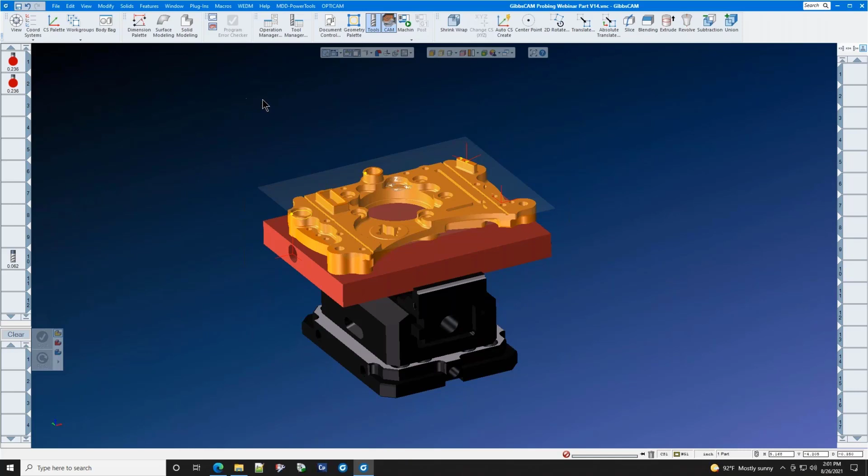Here we have a 5-axis vertical. Let's have a look at the machine real quick so we know what we're looking at. It is a Doosan DVF 5000. There's the machine, with the part sitting on the 5-axis table, and we will do some multi-axis probing today.

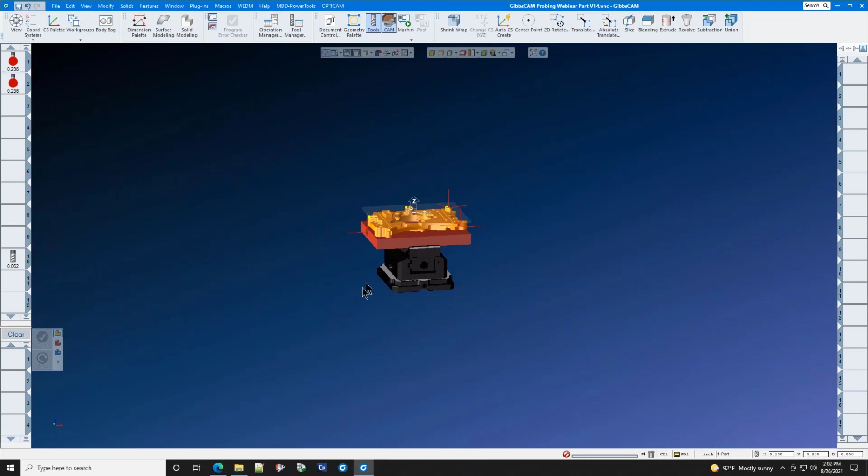Let's look at the part and the fixture, and we've already seen the stock. We're going to show you how to probe the corners of the stock using your Renishaw probe and the Renishaw Inspection Plus software that's already embedded inside your machine.

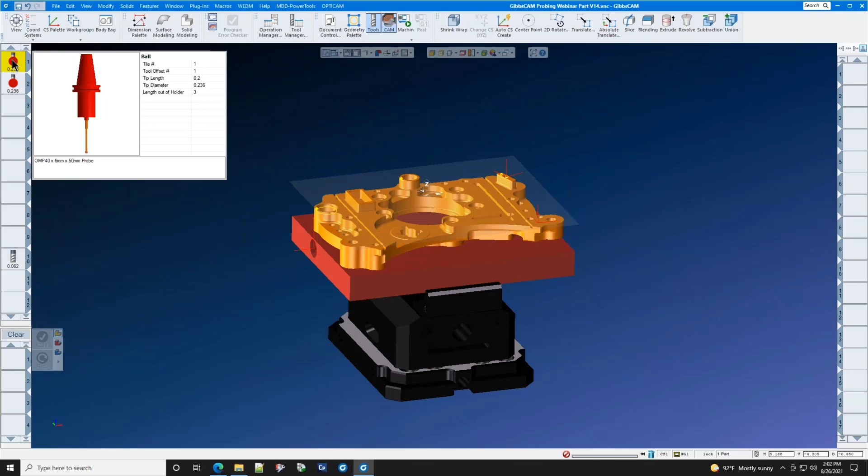Here are the two probes that are most commonly used: the 6mm by 50mm probe and the 6mm by 100mm probe. The diameter of the ball can vary, and you may buy smaller styli if you have smaller features to measure. But when your machine comes from the factory, it generally comes with these two styli, the 6x50 and the 6x100.

In GibbsCAM, you can create this tool very easily. Here are the dimensions if you'd like to snapshot this screen, and then you can save them to your tool list. Once you create a tool in GibbsCAM, you never have to create it again.

I want to take a quick moment to make sure that everybody can see. Yes, everybody can see and everybody can hear, so let's continue.

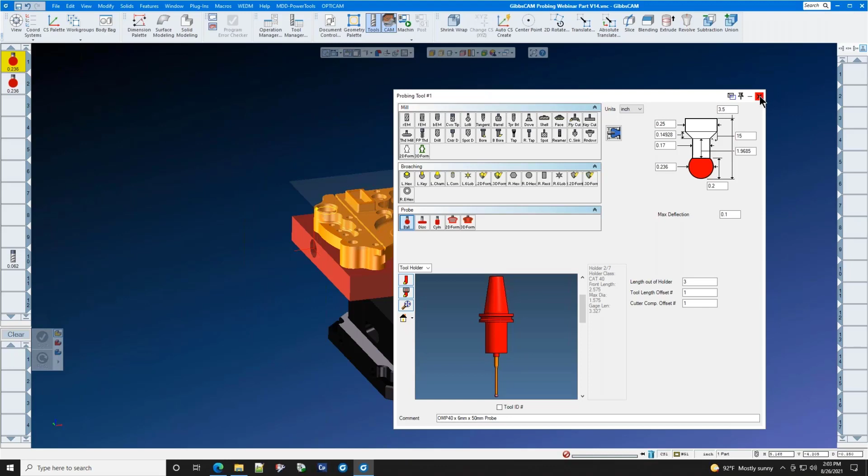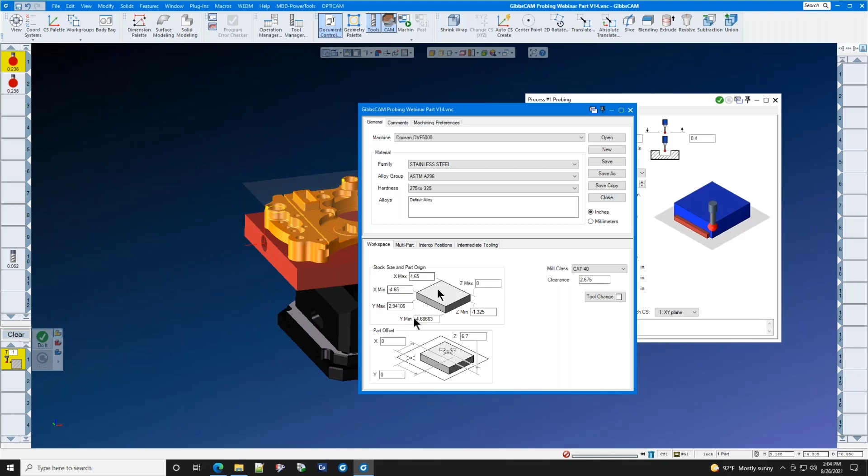Let's bring the probe down into the process list and select corners. In GibbsCAM, we have the ability to probe the stock corners, called out here in the document control page. If we want to probe other stock bodies, we will show you how to do that too. But this is for the corners of the stock size and part origin, and it's almost fully automated.

Here we type in the feed rate we want to use to approach the part. The probe touch time is a number you assign to this operation, so when you go to Operation Manager and look at your summary, you can see the time considered in your total cycle time. We're going to clear the part by 0.4, and once we get inside 0.4, we will go at a slower feed rate. Renishaw does that automatically. We're going to measure an outside corner, and set work fixture 1.

Our XY clearance is 0.4, which is a short way of saying 10 millimeters. In your Renishaw Inspection Plus software, 10 millimeters is the standard offset distance. I want to probe the lower left-hand corner with 2 touches. This 2-touch doesn't change what happens in your machine, but it does show a single touch or a 2-touch cycle here in GibbsCAM if you want to save time with single touch.

How far from the corner do I want to measure? My X distance of 1 and Y distance of 1 — I will measure 1 inch up and 1 inch over. My Z distance is to the center of the ball. I'm going to make this minus 250 because the ball is 236, and I want to make sure the ball gets below the outside of the stock.

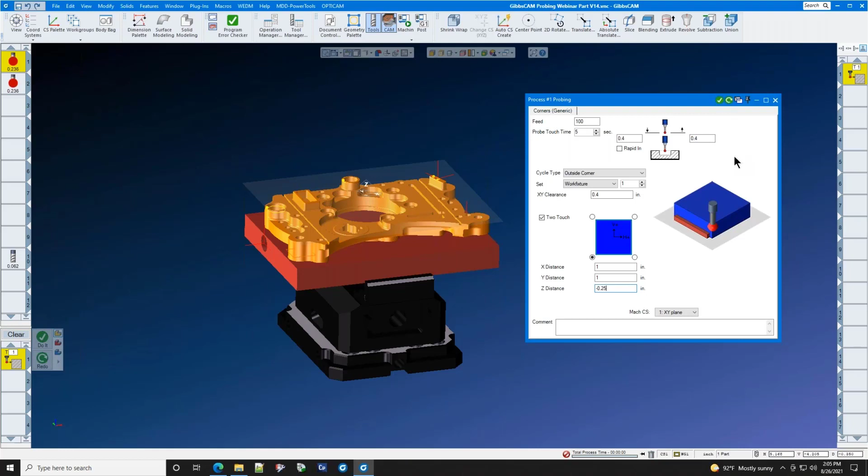When we click Do It, we get our first probing cycle. Let's look at it in Machine Sim and see what it looks like on the machine. Seeing it before you machine it is always the best way to review your CNC process.

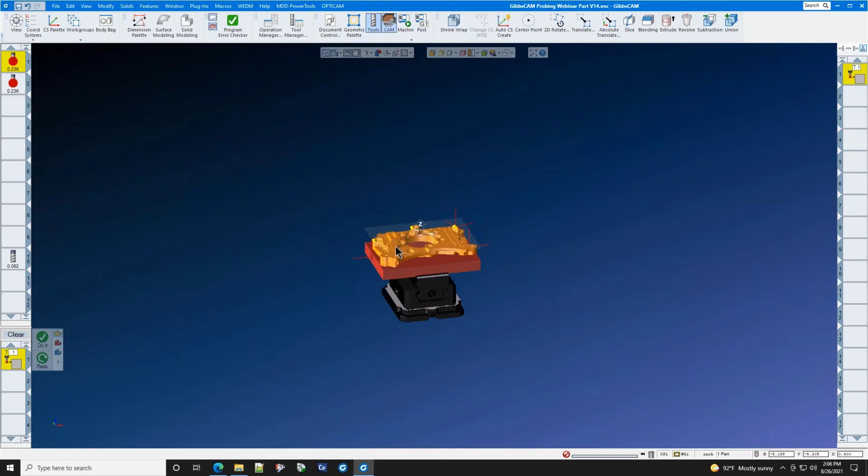We measured X and Y, and set X and Y in this coordinate system to that corner's coordinate. Now we need to do the Z as well. Change from outside corner to single surface from corner Z.

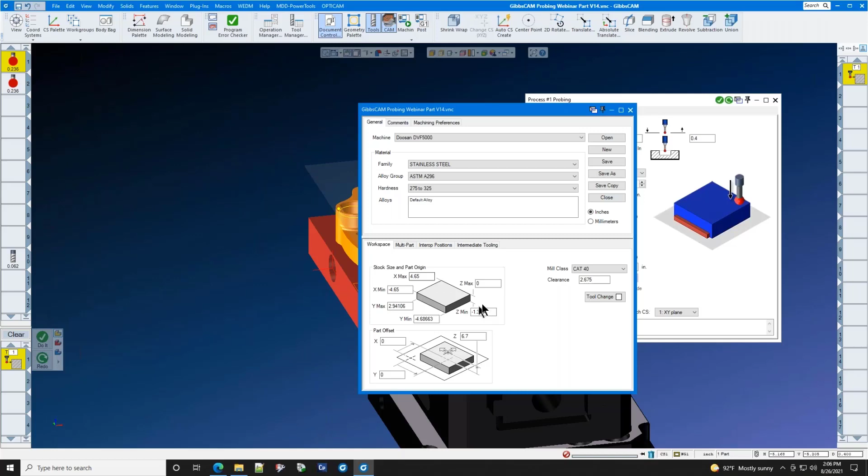The top of the stock is at 0. It's already been precision faced off, so we're going to set the probe depth at 0. When the probe touches the top of the stock, we want it to be set to 0.

This is a single surface corner, XY clearance 0.4, 2-touch, lower left corner, Z axis, and always from the positive side. It would be kind of difficult to probe this from the negative side. And of course, we're in the XY plane.

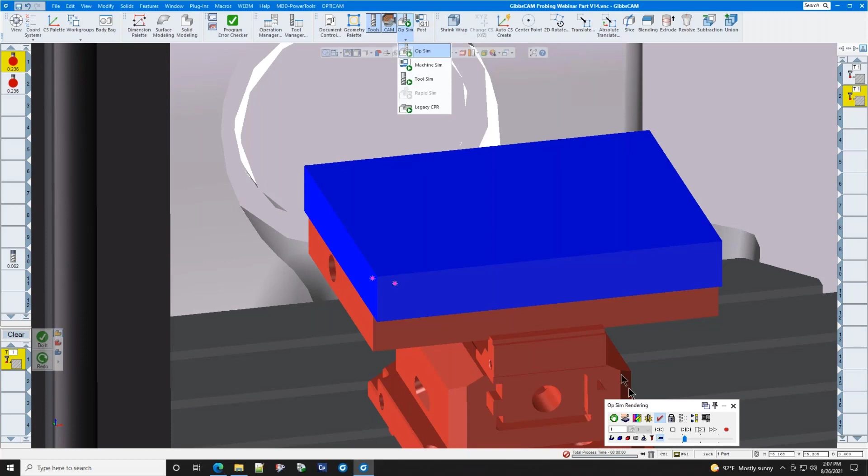When we click Do It, we now have 2 probing cycles. Let's watch both of them run, then change that to OpSim and rewind. You will see corner 2-touch, corner 2-touch, and top. We just set that corner to these coordinates.

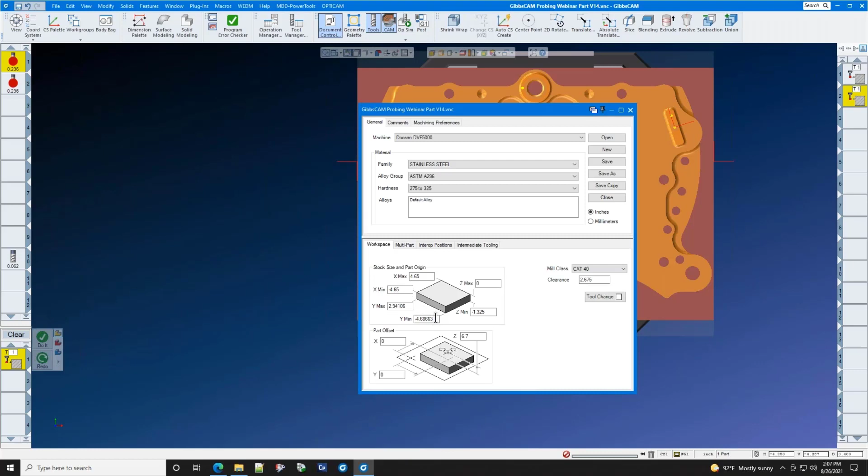You don't have to set your corner to 0. GibbsCAM and the Renishaw probe know that 0 is going to be over here, the distance from this corner. You can see the distance is X is minus 4.65 and Y is minus 4.68663. So don't worry about that — GibbsCAM and Renishaw will set your coordinate correctly.

You can duplicate this for each additional corner simply by opening the first op, changing to the upper left corner, and clicking Do It — you've got a probing cycle. Double click Op 2, change to the upper left corner, click Do It. You can do that all the way around the outside of the stock with very little effort.

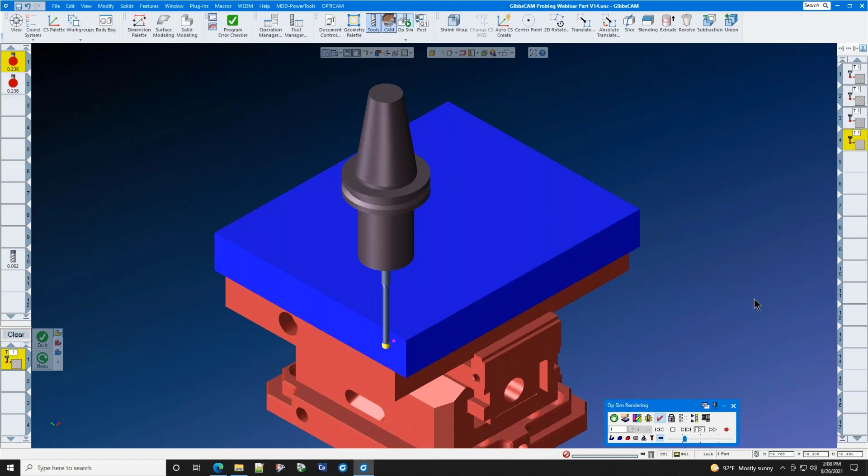The probe is a very accurate measuring device that most people only use as an edge finder. Here, we are teaching you how to use it as an edge finder. A little bit later in the webinar, we'll talk about measuring your parts and even updating the wear comp on your tools. Here, we're talking first about datum setting.

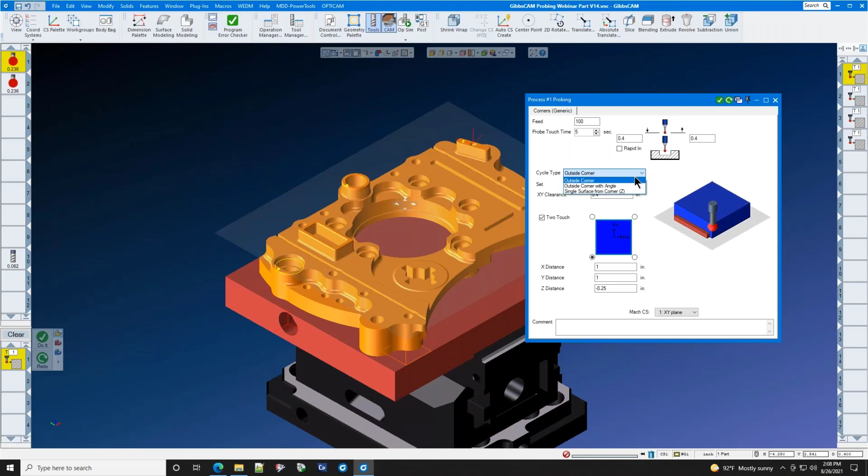And of course, let's review that. Datum setting is with work fixture or work plane. We're using work fixture, and we're doing corners right now. We did the outside corner and we did the Z.

Once you automate this, every time your operator puts a new part in the machine and closes the door, you have created a predictable, automated process that does not make mistakes. Your probe's accuracy is 40 millionths of an inch if you have the standard probe. If you purchased the improved accuracy probe, which is a CMM quality probe, your accuracy is 10 millionths of an inch. So the probe is much more accurate than your machine.

Let's move ahead a little bit and talk about probing other types of features. Remember, this webinar leans a little bit more towards how do I probe rather than why do I probe. The first thing I'd like to look at is let's measure this bore and this boss right here.

And we're going to use that feature to set our 0. Bring the probe down. Select — now, instead of corners, we will select shapes.

We will set our feed rate at whatever your machine can tolerate, or whatever your machine is programmed at from Renishaw. I'll put 4 seconds in here for touch time, and the standard Renishaw standoff distance of 0.4 and 0.4. Let's do circular pocket first.

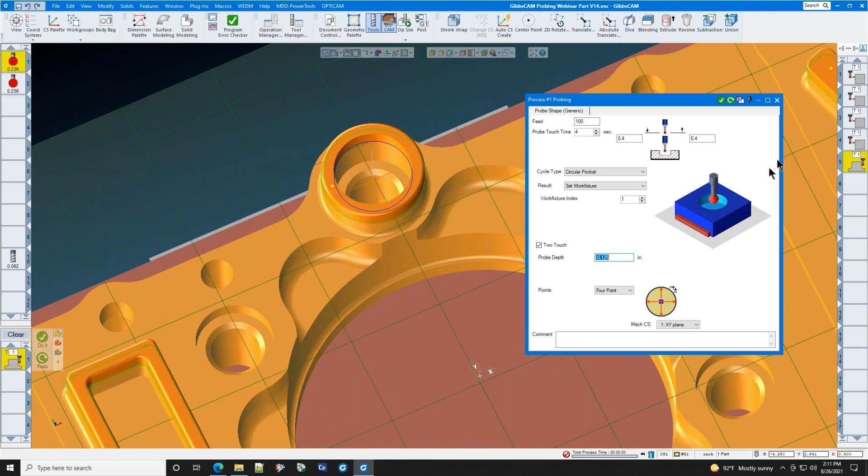Let's have a look at that cycle by itself, but first we need to set the part to stock. Click on the part, right click, body type is stock.

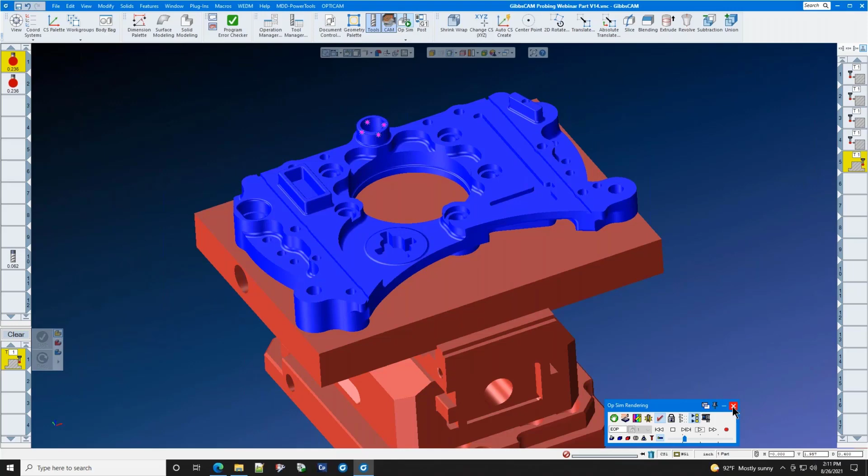Now when we go back to OpSim and press rewind, we will see the part, and let's select here, skip unselected ops. That way we don't have to watch the corners. Let's probe the bore. 1, 2, 3, 4. It just probed that bore very quickly, and it output the dimensions of that bore to your offset table, which means that this is going to be the center of your part.

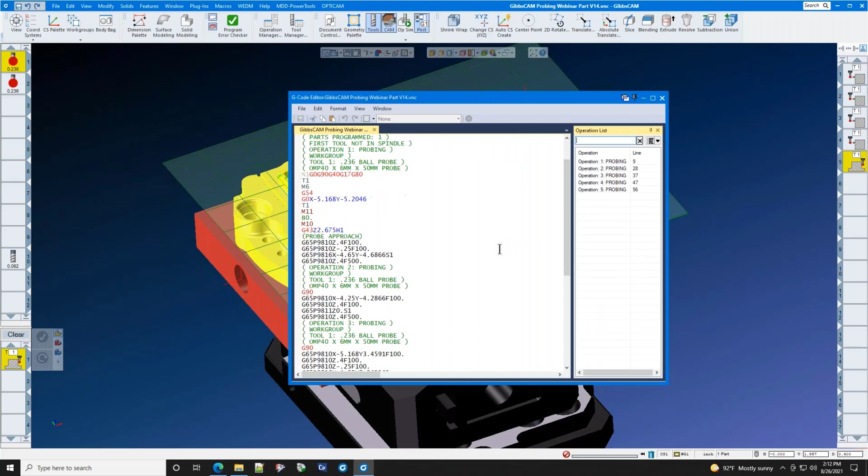The probe and the GibbsCAM software, all of this happens automatically. Here we have a probing post, and we're going to output the code to this folder and click Process. Here you will see very neat, very clean Renishaw code. If you've written any of this by hand, you'll recognize it, and it's very, very easy to understand, especially when you have your Renishaw Inspection Plus manual in front of you. There we have a little bit of code, and we measured that bore.

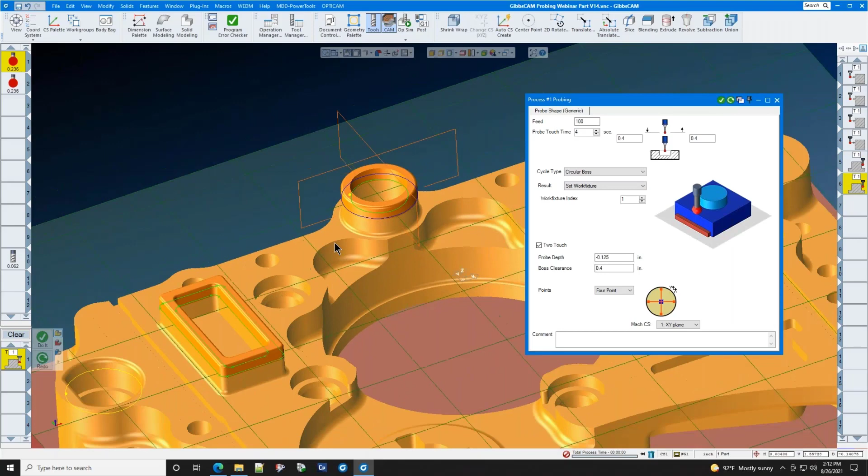Let's change up and measure the boss now. Double click the process. We can simply reuse it. It has almost everything we want, except we'll change this from circular pocket to circular boss. Select the outside boss geometry and click Do It. Again, we have a cycle that looks very different from the circular pocket cycle. It knows to step up and over the boss when it's doing the measuring process.

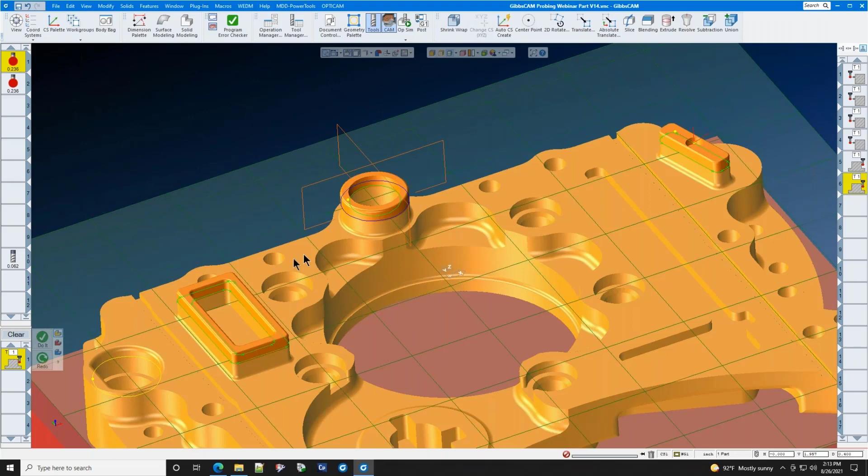Notice that while GibbsCAM is measuring your part, it puts a little star on the part to show you where the probe touched. Again, we have just set the work fixture offset using that feature. That feature may have been pre-machined, and then we want to accurately set its distance to the center of the part. Now that we've looked at circular pocket and circular boss, let's look at single surface.

In single surface, the only geometry that you need is a point. We have a point here, we have a point here, and we have a point here. The interesting thing about these points is when we go to single surface and we have our probe depth for Z, we're going to single surface, axis is Z from positive side. What is our probe depth? Well, we're not quite sure. We can alt click on that point and GibbsCAM automatically puts the number here. We click, check our parameters and do it.

And we now have a Z probe, a single surface probe right on the edge of that D hole. And we're going to come back and measure that D hole in a little bit because we all know the challenges of a hole that is shaped like a D. But let's go probe a couple of other Z points. Here, very quickly, we'll change the Z probe depth with the Alt key to 0. Click the point and press do it. We have another probing point there.

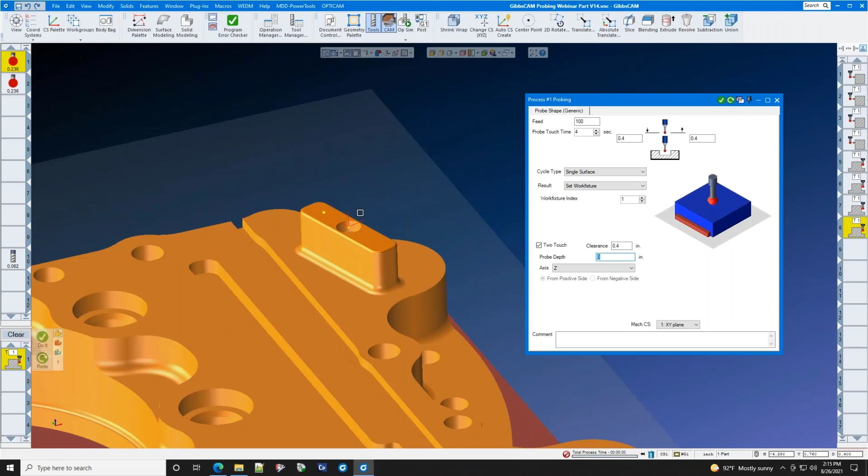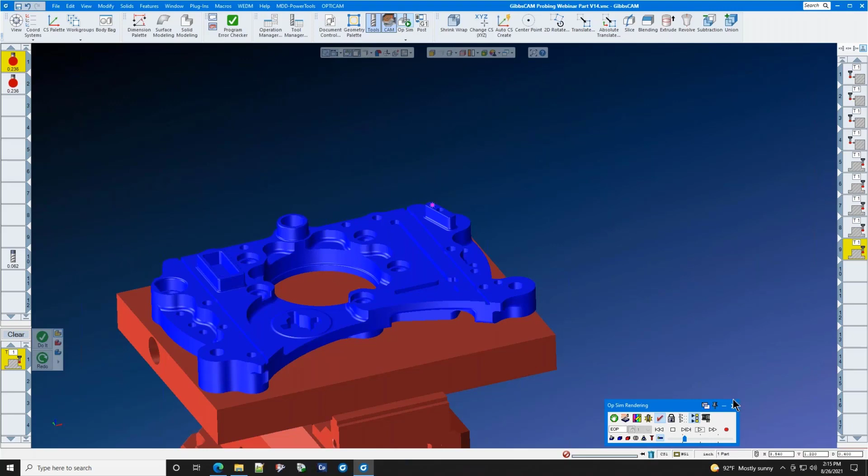Let's check this one's Z point. It is also at 0. Simply click on it and press do it. It's very easy to create probing code, and the code doesn't need to be tested. The code is tested right here in a virtual environment, and you can be assured that when you go out to your machine that everything is going to work correctly. You have visual verification that your probe is doing what you want it to do.

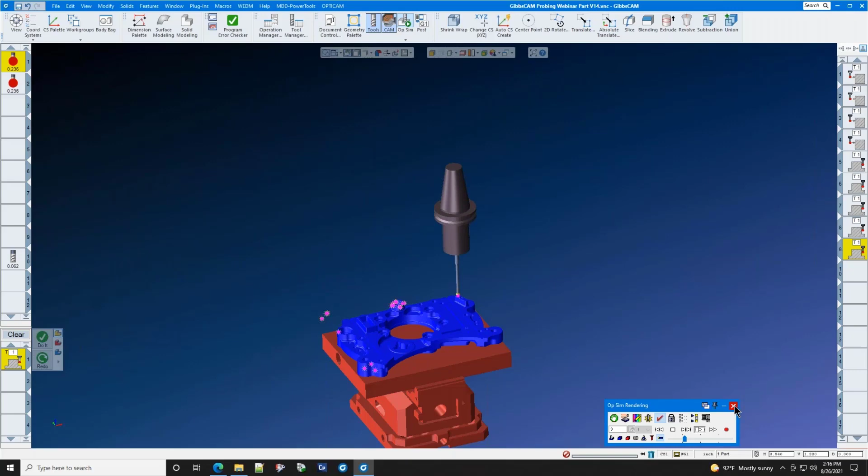Speaking of which, the new probes are much smarter than the old probes. When GibbsCAM puts your probe in the spindle, the software checks the battery condition of the probe. It makes sure that the probe is hot and running. It makes sure that the skip signal is hot and running in your machine. And it ensures you that your machine will be ready to probe if you don't get any alarms at the beginning. We just probed a couple of circular features.

Now we have another circular feature over here that's quite a bit different. It's a D hole. And as you can see on the D hole, it has a little D shape. I extracted the complete circle because we need the complete circle when we're going to measure that hole. But what do we do about this position right here? If I click there, that's a disaster waiting to happen. You're going to get an alarm at the machine. It's going to say not found.

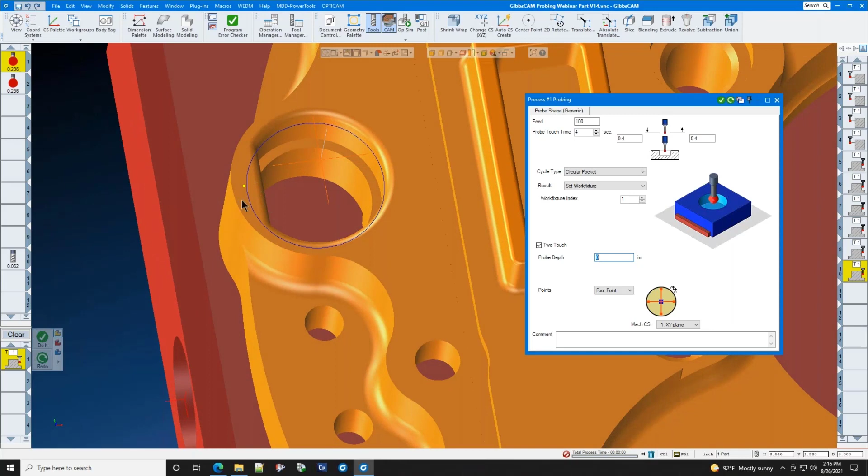And let's make that depth a little bit better. We got minus 375, and we'll make that minus another 125 and redo. But when we get to that point, that's going to make a horrible mess.

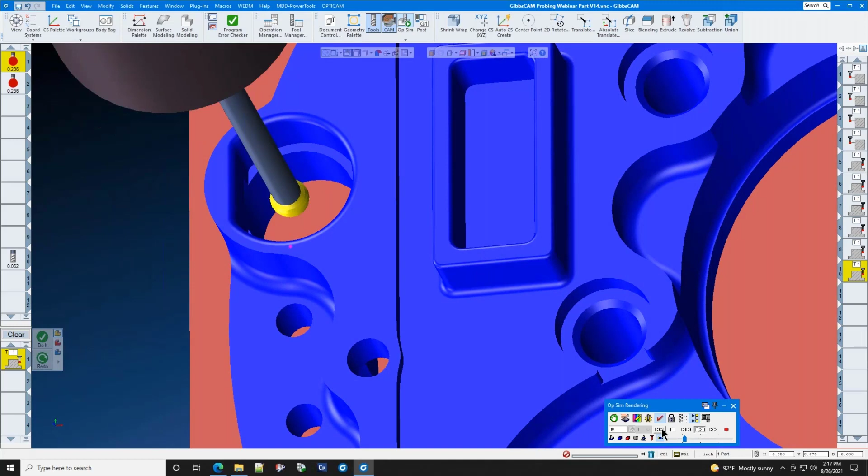And in GibbsCAM, watch what it shows you. When we go to measure the part with that D hole and the cycle is incorrect, let's click here, which is skip unselected ops. Oh, it went all the way into the material. Not good. We get to see that. What can we do about this little situation?

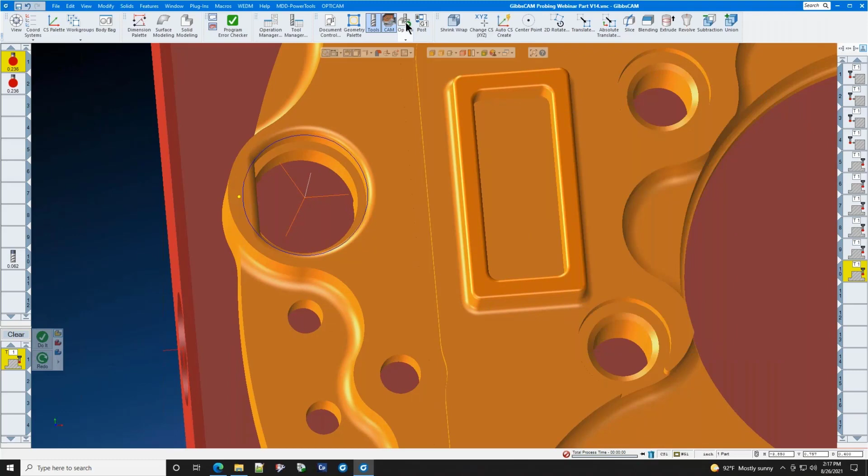Let's change to 3-point and set our angles to 0, 120, and 240, and click redo. Now we have avoided that D feature. Let's have a look at the cycle again, rewind and play. And the probe now very deftly avoids the D feature. You can rotate your circle to any degree by using these 3 points.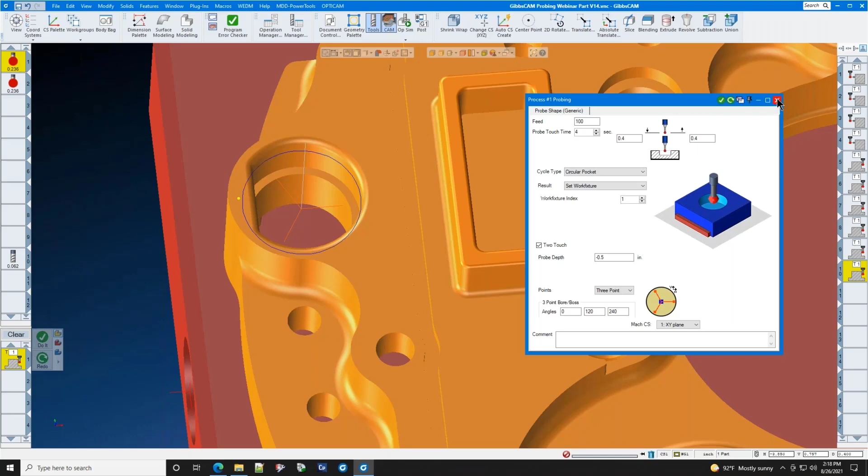The only rule that you must abide by is the same rule that you have in your CMM lab, is that the circle that you measure here must have at least 185 degrees of included angle. If you don't have that much angle, your probing application will not be correct. We know this from practice with all types of probes and probing systems. We need to pass that second quadrant.

Now, let's look at rectangular features. We have a rectangular boss and a rectangular pocket. Let's change cycle type to rectangular pocket. Probe depth, let's find out the roof of this. It's at 0. We'll make the probe depth minus 0.125. And we get to select X and Y, X only, or Y only. Let's do X and Y and do it.

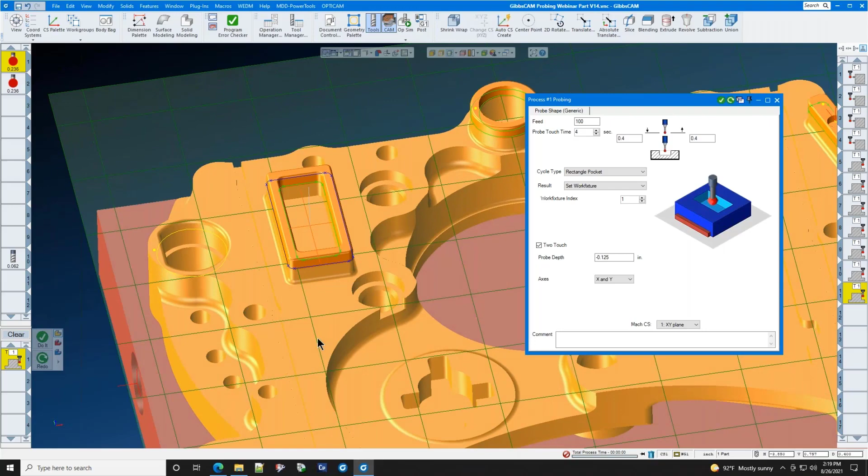Whoops, I didn't click on the geometry. Turn on the profiler, click on the profile geometry, and redo. So I clicked the wrong geometry, and it will show me that when I run the cycle, this cycle will run clear through the material. We simply need to click the inside geometry and redo. GibbsCAM will show you when you've made a mistake.

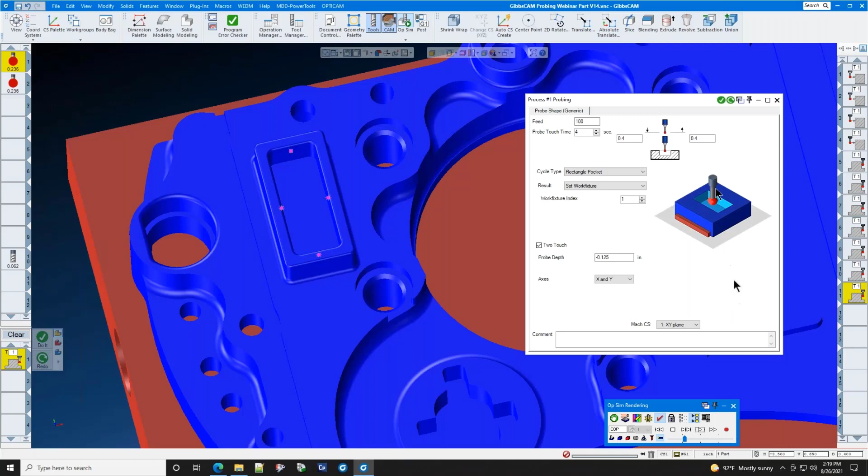When we go to OpSim, rewind and play, we now see that the probing cycle is correct for that inside rectangular pocket. We'll skip this rectangular boss because we pretty much know how it works. Let's do something a little bit more exciting.

Let's go work on this rectangular boss, which is rotated at an angle, and an angle that we have no idea what it is. We can measure it by extracting geometry, or any number of things, but GibbsCAM and Renishaw can figure out the angle for us automatically. Rectangular boss, probe depth, X and Y, select the geometry and press do it. And what do we get?

Oh no, that looks horrible. That's terrible. Why didn't the software recognize that that was a skewed rectangle? Because Inspection Plus does not have that ability. We have to create a new coordinate system. And to do that, we created a coordinate system. We click on the geometry and click redo.

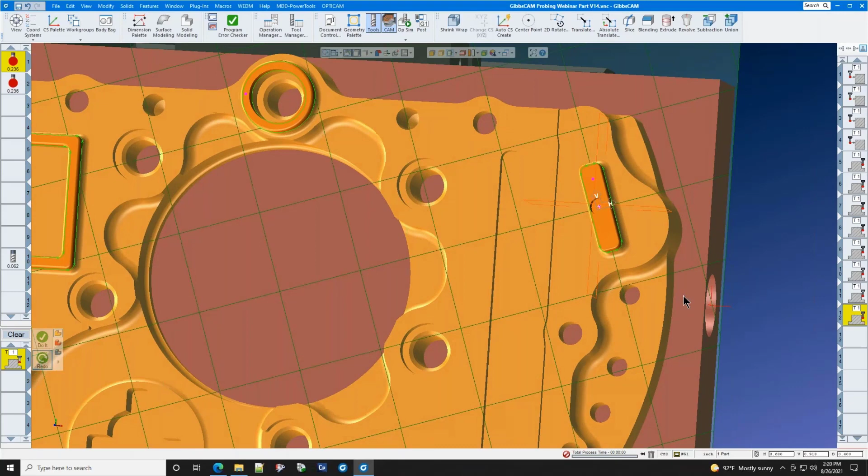And now you can see that, whoops, no, it has not straightened itself up. What do we do about that? We change our machining coordinate system. Change it to rotated coordinate system and press redo. Now the probing cycle, when we click the geometry, will be rotated at the correct angle to measure this part.

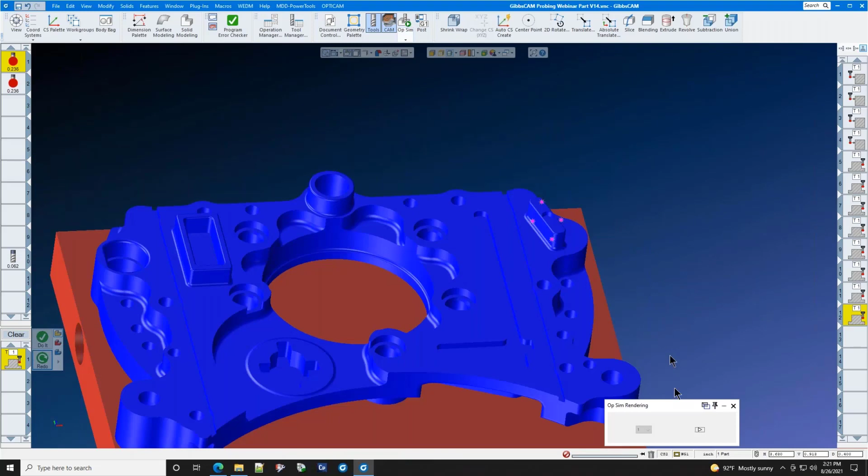And it will also return the angle of that part, and it will put it in an offset register, a macro variable register inside of your machine, and you can read that for yourself. So we've talked about probing all of these different features, circles, pockets. Let's talk about probing a single line.

Do I need to extract a single line to probe on the left side of this part? No, GibbsCAM automatically knows. Go back to single surface, and this will be X from negative side. The depth is good, the clearance is good, everything looks good, and we're in the right coordinate system. Click do it, and it measures the left side of the part.

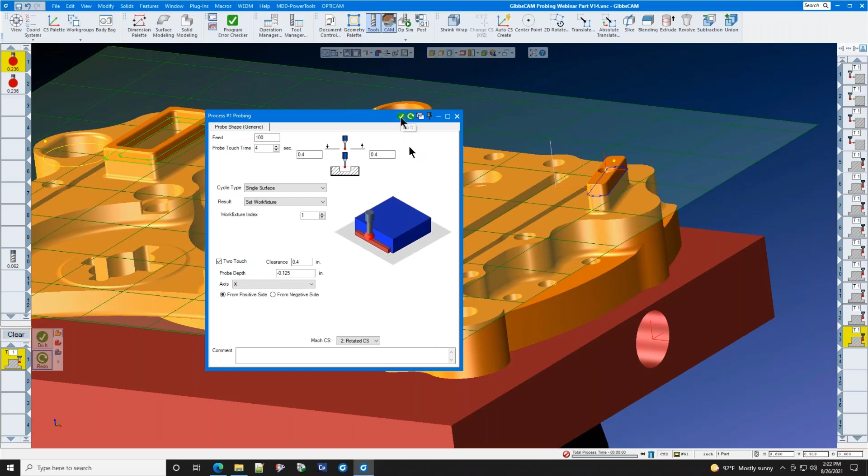If we want to measure the right side of the part, click over here, click from positive side, and do it. We now are measuring from the positive side of that line. Let's switch up and go to the y-axis because we only have a very tiny line there from negative side, and GibbsCAM and Renishaw can find that line for us.

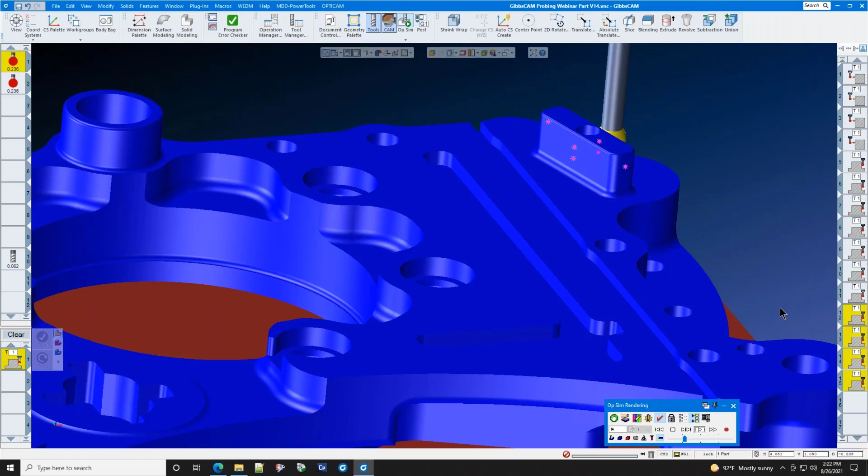Let's look at those last couple of operations together in OpSim and selected ops only, where we have a skewed surface. First, we have the outside boss. Then we do a single surface, and single surface. We've brought to you a large amount of capability in measuring and finding your parts.

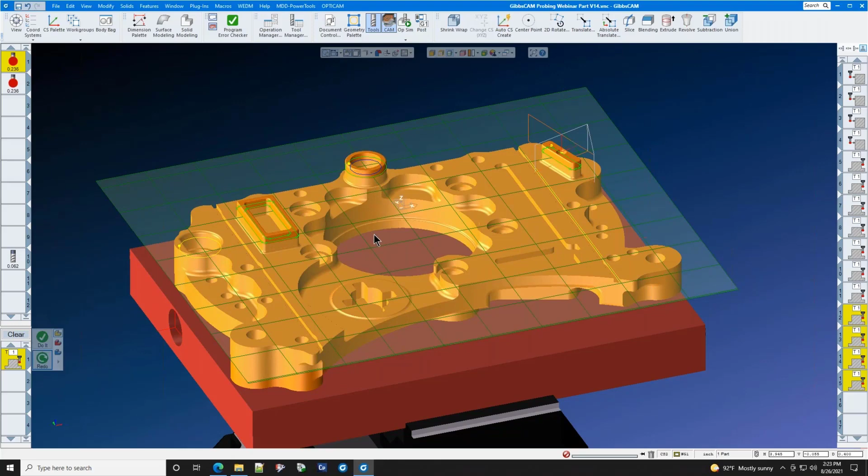But what about cutting your parts to a tighter tolerance? Let's say that this bore has a very, very tight tolerance. What we would do with this bore is we would machine it first and leave 5 thousandths worth of stock and then measure it. Let's do just that right now.

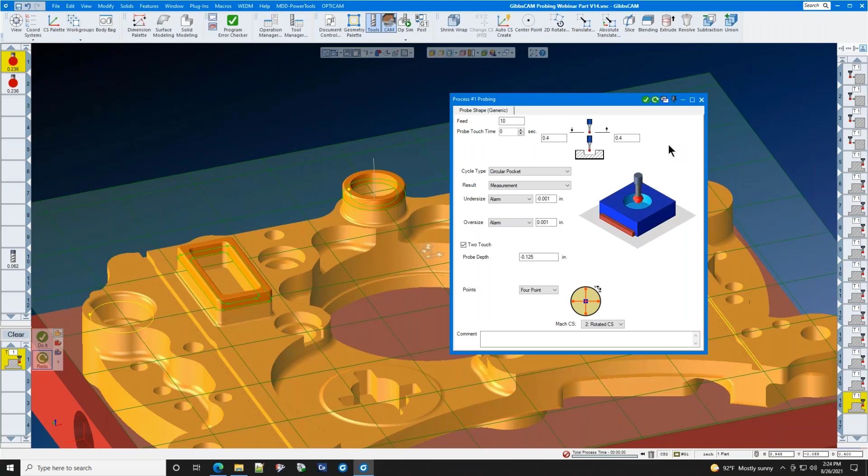We're going to measure that bore. Circular pocket, depth, four point, but now instead of setting work fixture, we're going to measure. And if that bore measures 1 thousandths outside of the tolerance range, the machine will automatically stop and alert the operator that this part is out of tolerance. If the part is in tolerance, we would continue on with the finished cut.

Let's have a look at that operation by itself. This operation is missing something. Let's post the previous op and this op so that you can see the difference between them. Notice that this op on the probing measure line, it has an S1 value. That means that it's going to set work fixture 1. Down here, there is no S1 value, but there is the H tolerance value.

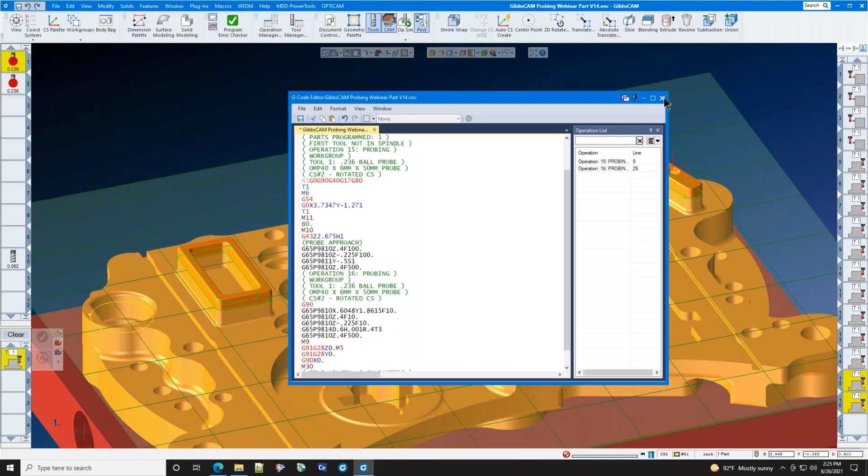If you want to output the deviation of that circle to your wear comp table and have the Renishaw probe and GibbsCAM update your wear comp automatically, simply put the T number behind that line. When you put T3 right there, that will automatically add the deviation to your wear comp, and then you create a finish op for that bore, and you have cut that bore to the tightest tolerance that your machine can achieve. We call this cut, measure, cut technology.

And in cut, measure, cut technology, if your machine has a total tolerance capability of 4 tenths, then the Renishaw probe will help you get to that 4 tenths without opening the door, climbing in the machine, measuring the part, coming back out, going to the wear comp table, adding the numbers in. We have interrupted the program by stopping and having someone measure.

By using GibbsCAM to automate your probing, all of this happens automatically and reliably and without detriment to your cycle. Your cycle becomes much more predictable. The machine heating and cooling becomes much more predictable on very tight tolerance parts.

We've looked at measuring the part in a number of different ways. Let's see what other options that we have here under measurement. We can alarm if it's oversized, but let's say the bore is undersized and we don't want an undersized alarm. We just say continue, because if a bore is undersized, that means that it is in a maximum material condition and we can continue machining. Only if the machine bore is oversized would we have a problem with a bore. Now, a boss is exactly the opposite. We would leave its alarm for undersize and continue for oversize.

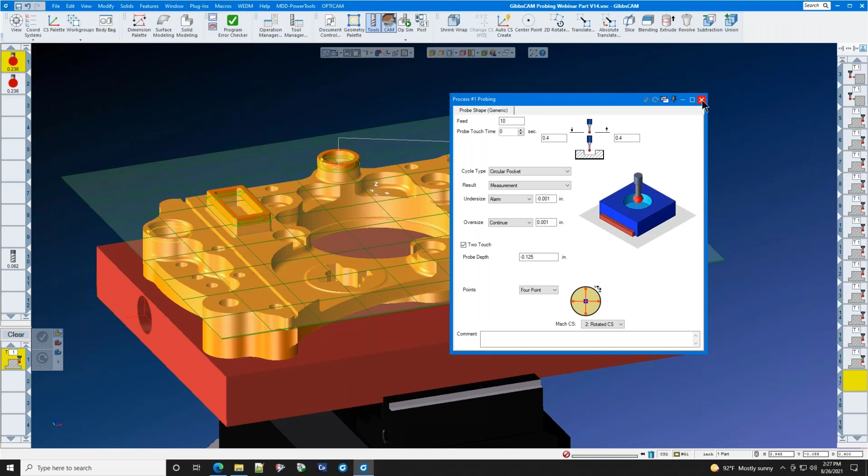All of these little tricks help you create a more accurate, more reliable program. It helps you slash setup time. It helps you reduce your lead time, reduce your process variability, reduce scrap and concessions to your customers, and to make your process more predictable.

You can measure your parts after you're done, and when you output that measurement, where does the measurement go? If you look in the programming manual of your machine, you will see where the outputs go. On a Haas, the diameter would go to parameter 138.

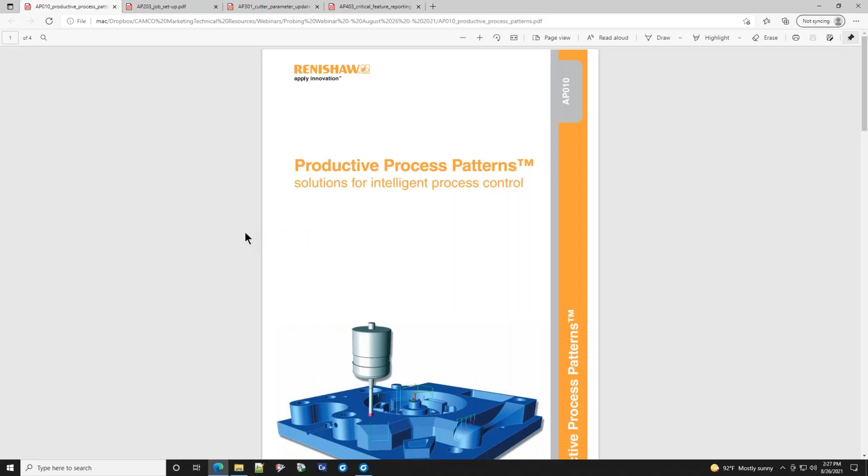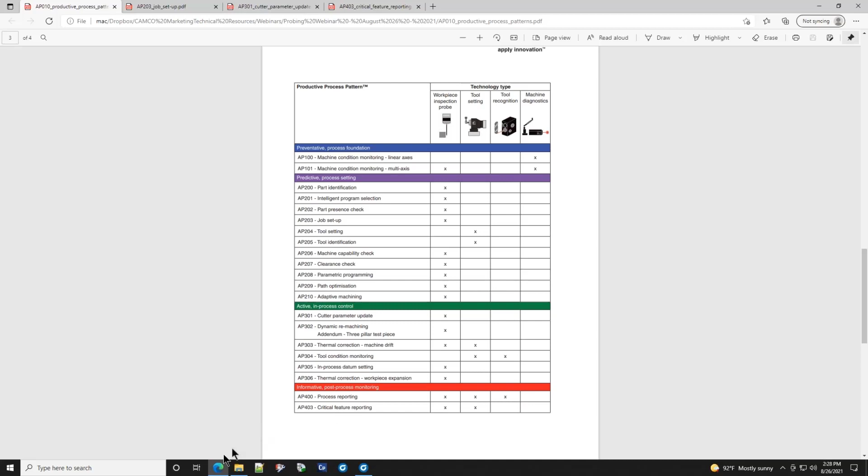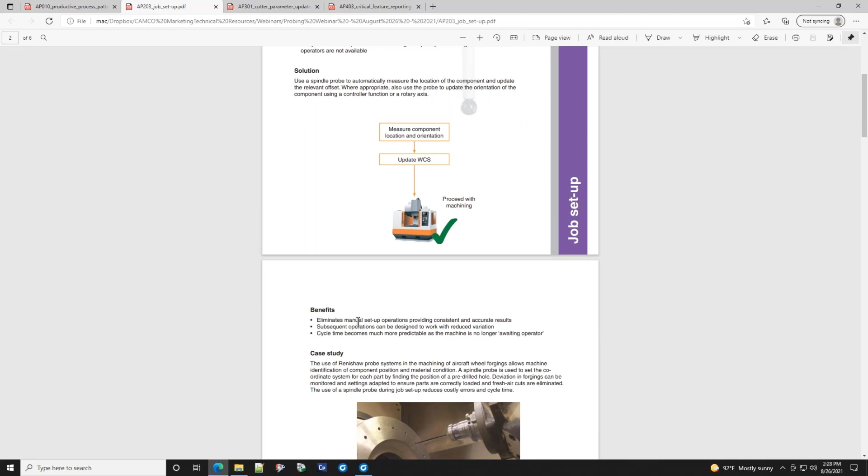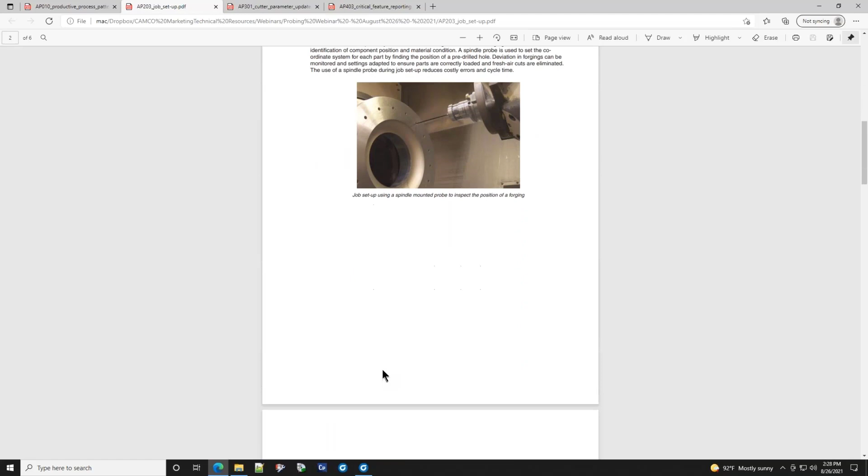There are a number of handouts that we have for you in the downloads area, and those are things that we have just talked about, things that we do just before cutting, things that we do during cutting, and things that we do after cutting. You can simply click on those links to download those documents. These documents give you a problem, they give you the solution, and they tell you what the benefit is of using the probe in an automated fashion inside of your machine. Each of these documents also includes a case study and shows you what the code is going to look like when it comes out to your machine.

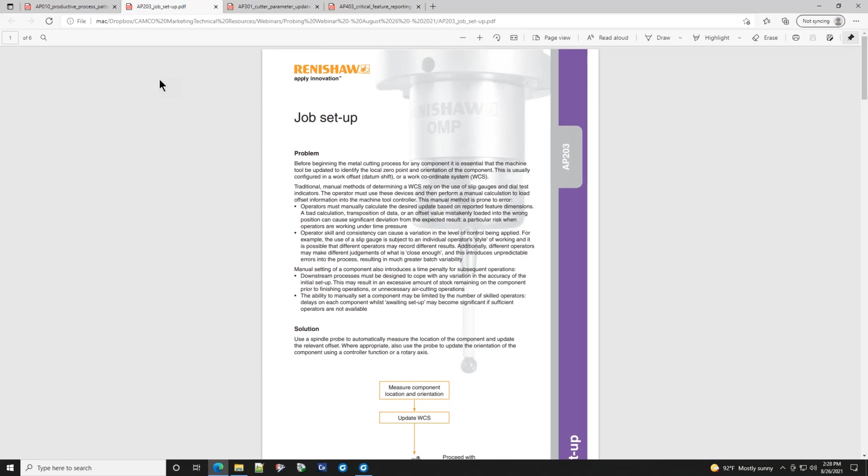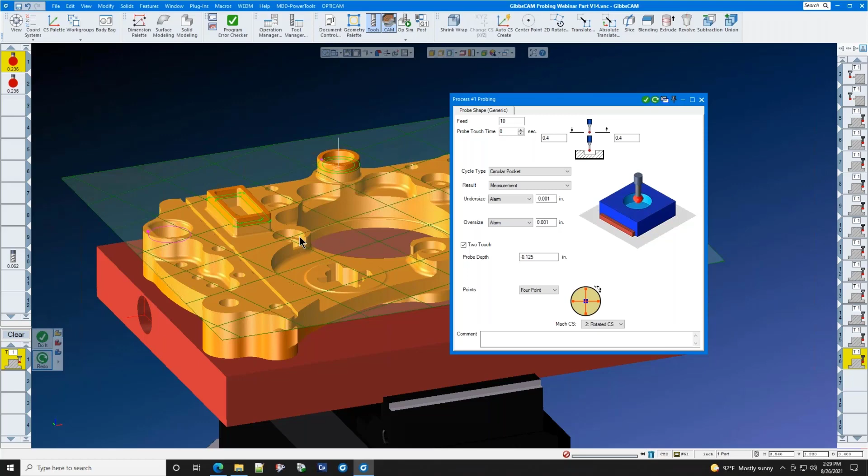This is Step Application Protocol 203. You've seen this many times when you import a solid model. Step AP 203 simply means datum setting. Step AP 301, cutter parameter update. Remember, we showed you that adding a T3 to the end of that probing line will automatically update the wear comp of your tool. It gets even smarter than that, because the wear comp for a Z feature is different from the wear comp for an XY feature, but the software automatically knows that information.

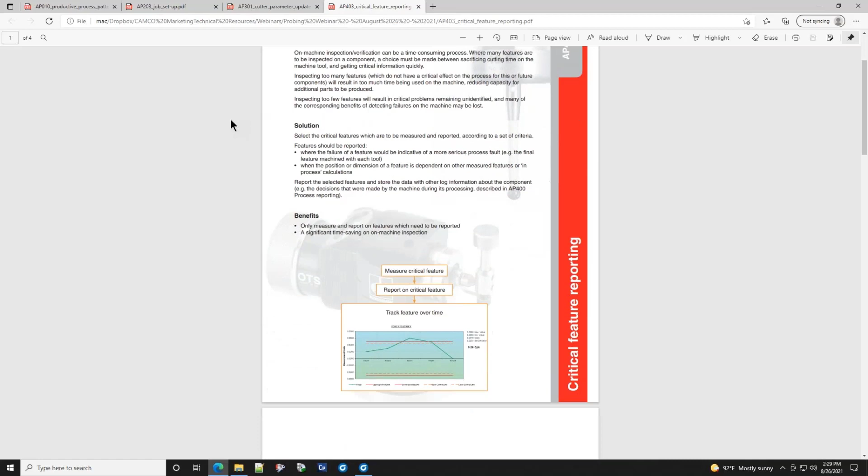The last thing that we have here is another document that says critical feature reporting. You want to be able to look at the dimensions of your part and alarm your operator if the dimensions exceed. You have a lower tolerance band, an upper tolerance band, and you have a fail band here. The warning is yellow, and red is a failure. And the machine will stop automatically when you get to the failure.

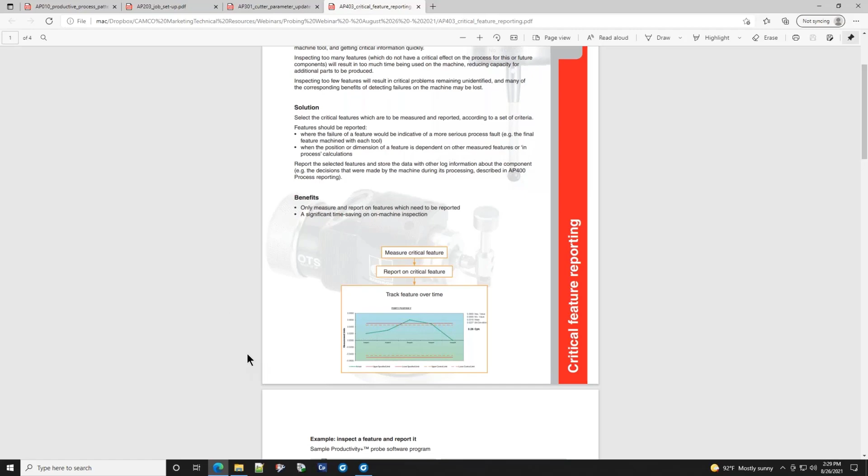We hope that you have enjoyed the how-to section of this probing exercise. We're now going to switch over to Mr. Bart Ehlers, and he's going to take any questions that you might have.

Hey, Patrick, thanks a lot for once again doing a great job showing the benefits and the power of doing on-machine in-process probing. Lots and lots of value there, and hopefully a lot of the customers are already doing it, and they want to increase that power by getting GibbsCAM, or if they're not, hopefully we've shown them enough benefits that they'll want to discuss it. We do have a few questions to go through, so let's start with the first one.

Can GibbsCAM probing adjust the tool wear compensation on my machine? Yes, it can do tool wear compensation on your machine. And if you have a Siemens control, a FANUC control, and when I say FANUC, we mean FANUC clones as well. A FANUC is a FANUC, but you have Mazak, you have the Mori Seiki MSC, you have the Mitsubishi 700 series, and we also have some other FANUC clones out there.

We talked about Mazak. Oh, the Makino Pro series is also a FANUC clone, and they all use almost identical software. And yes, that wear compensation can be automatically added to the cycle, and it runs each time you run a new part.

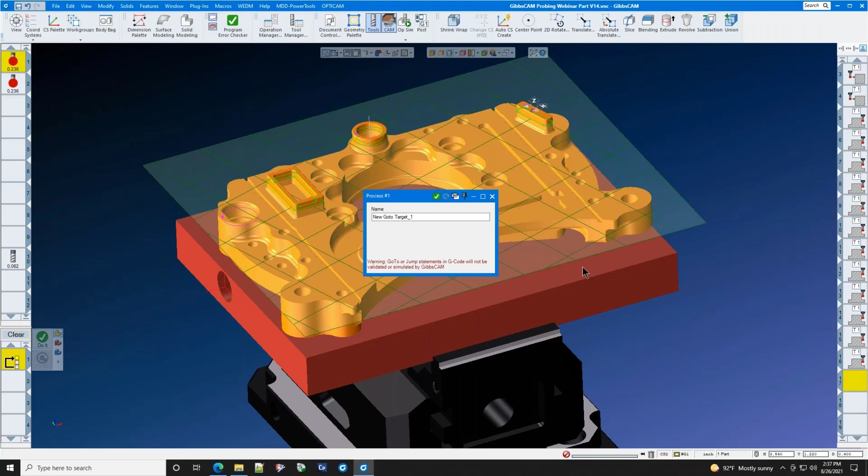Go ahead. Yes, your post processor can be configured so that when you create a semi-finish operation, a probing operation, and a finish operation, if the part is within tolerance, you can specify a go-to block, and we would do that by selecting utility ops and go-to. And we have a go-to target we'll set down here. That is our target. And then we would say up here, measure the part, single surface, and if it's undersized, alarm. If it's oversized, then go to target 1.

The answer is yes. We can create go-to segments that will steer the probe or the tool around an operation that either, number 1, needs to be cut, or number 2, doesn't need to be cut and can skip over it. Okay. Another question.

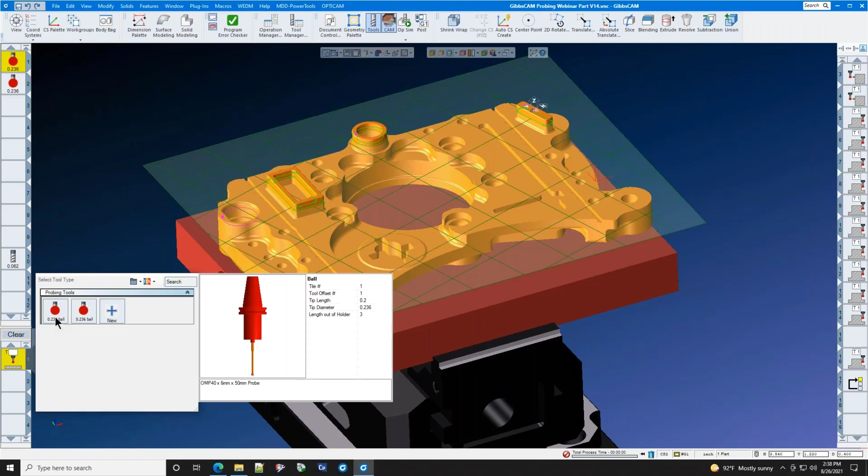Can a user still use their own programming cycles that they created in the past? Yes. We made a special provision for customers who may have invested money in a probe macro. Let's select a probe here. If you have a huge probe macro or any probe macro that you've customized and made your own, you can simply paste it right here, click the do it button, and you now have an operation that has your custom probe macro in it.

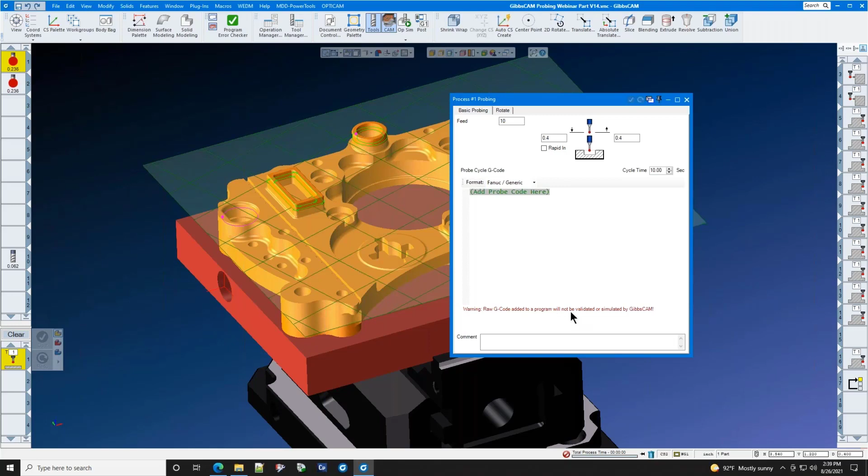The only caveat here, as you can see down here in red, is that warning: raw G code added to a program will not be validated or simulated by GibbsCAM. But yes, you can use your previous investments in probe macros, paste them right here, and create an operation out of them. Okay. And there it is. Now we have two.

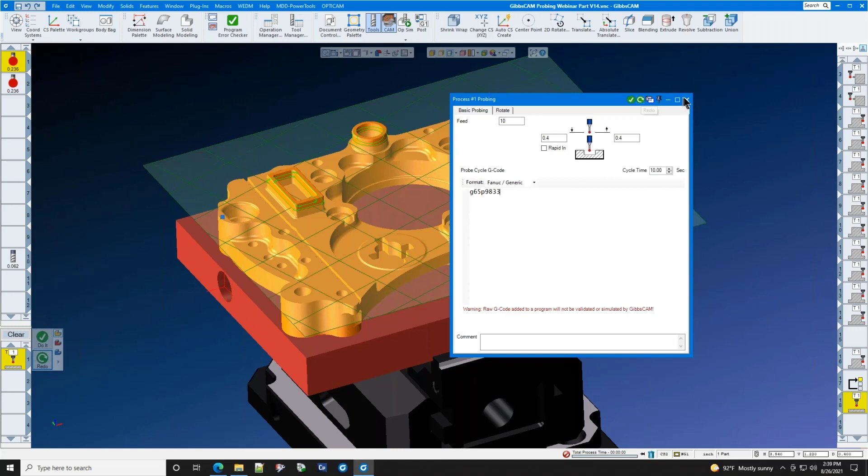Well, now we have two very similar questions. I'll just ask the first one. If I currently have P+, can I also use the new GibbsCAM probing? Yes, you can. Both Renishaw Productivity Plus and Renishaw Inspection Plus can reside in the same machine at the same time. They were made to do that. Productivity Plus is a much higher level program for much more rigorous and demanding applications, but GibbsCAM covers the basics of datum setting, cutter parameter update, and critical feature reporting.

Productivity Plus can go way, way beyond that. And yes, both of these can be resident in your post at the same time, and they can be resident in your machine at the same time. And they do not interfere with each other, and they do share the probe calibration data. One set of probe calibration data for Productivity Plus and Inspection Plus.

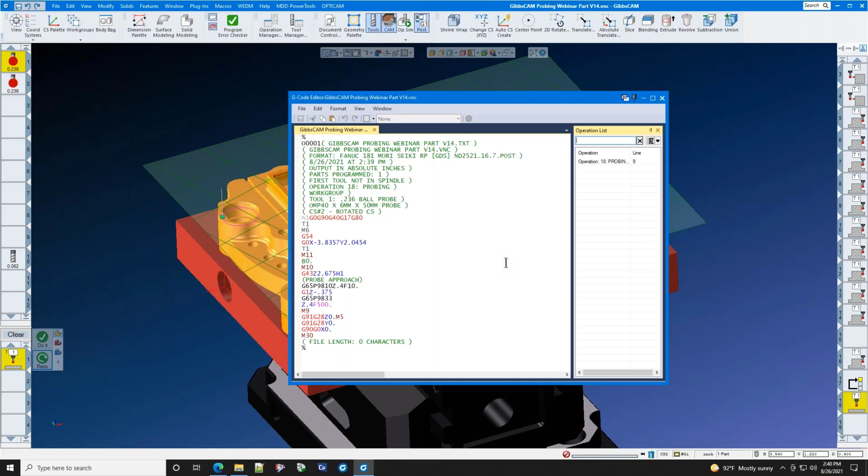Here's one I think I can take, but back me up if you want to expand. If I need more probing functionality than what's available in the new GibbsCAM probing, is P Plus still available? The short answer is yes, it's still available.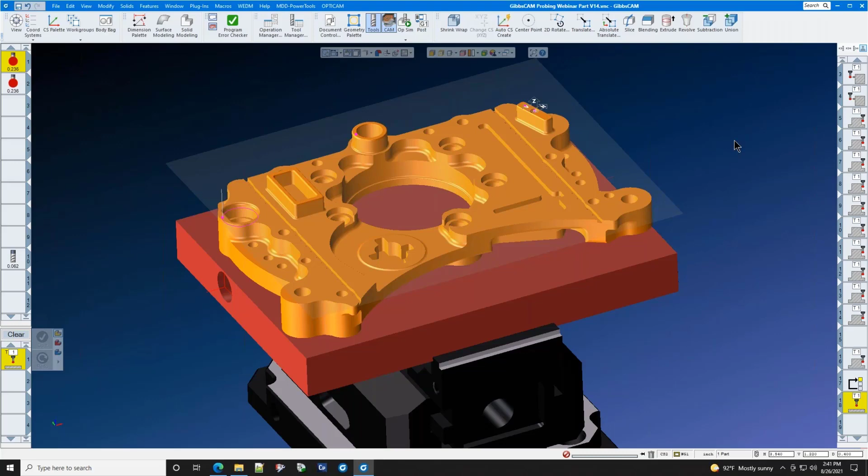The longer answer is P Plus is reaching end of life, meaning they're stopping development on it. But that doesn't mean it's not available or doesn't work. It's still there, just frozen in time. As it phases out, the plan is to continually increase GibbsCAM probing to fully take over all the functionality currently in P+. But for now, P+ is still available if you need more robust probing capabilities than GibbsCAM probing currently offers. Anything to add, Patrick?

No, you hit it right on the head. I'm just, while you're answering those questions so expertly, playing and creating little probe cycles here. Okay, all right, let's see.

We got this question, we've got two more questions we'll do. How do I switch from P+ to the new probing? I'll let you take that, Patrick.

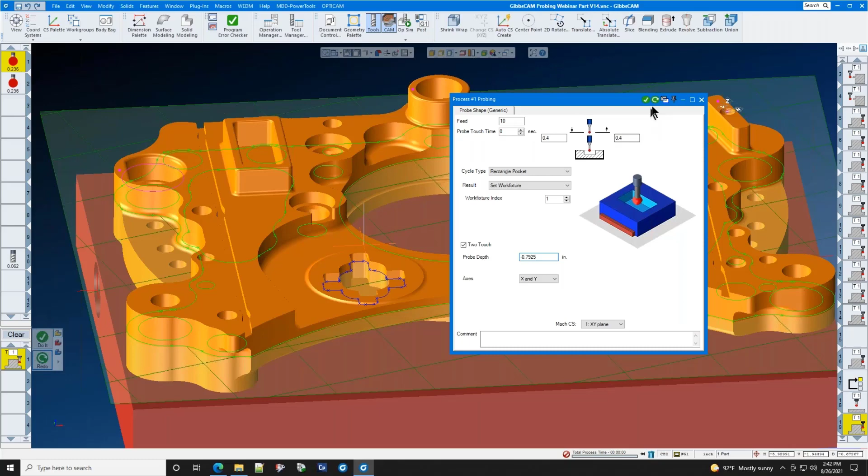Switching from Productivity Plus to the new probing requires very little effort on your part. The only thing you need to do is invest in the GibbsCAM probing option, and second, have your post processor updated for GibbsCAM probing content. Just those two things. And as we already answered, we can capture a bunch of your probing cycles that you've already developed inside GibbsCAM probing. So really, the process to switch from P+ to GibbsCAM probing is just a matter of a purchase issue.

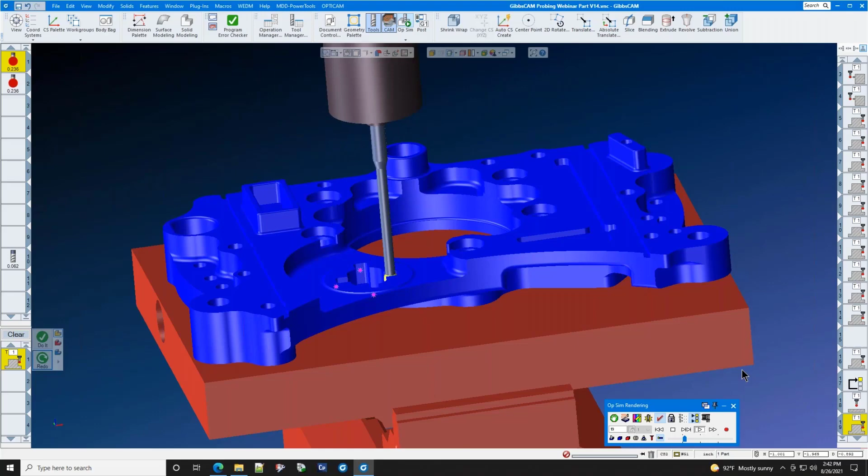Again, if this is something you want to explore, contact your GibbsCAM reseller. All right, let's see, we'll do one more question.

This one says: can the OTS tool setter be programmed in process for tool setting before machining ops, and can broken tool detection before... oh, say that again, I'm sorry, I interrupted you.

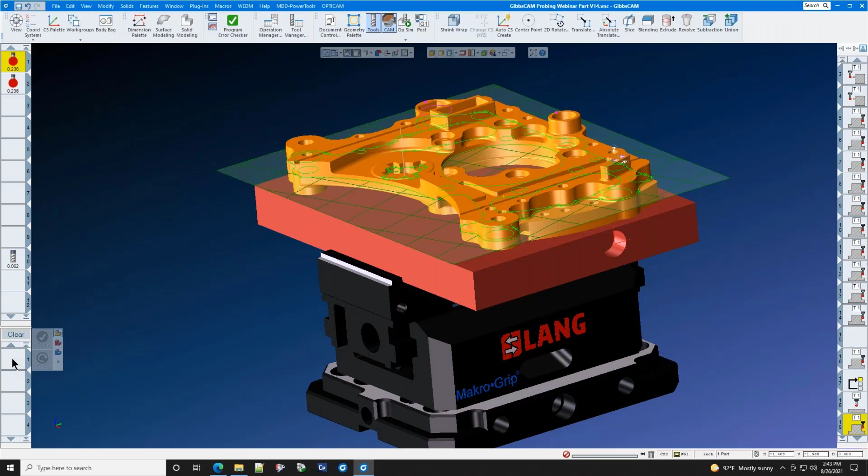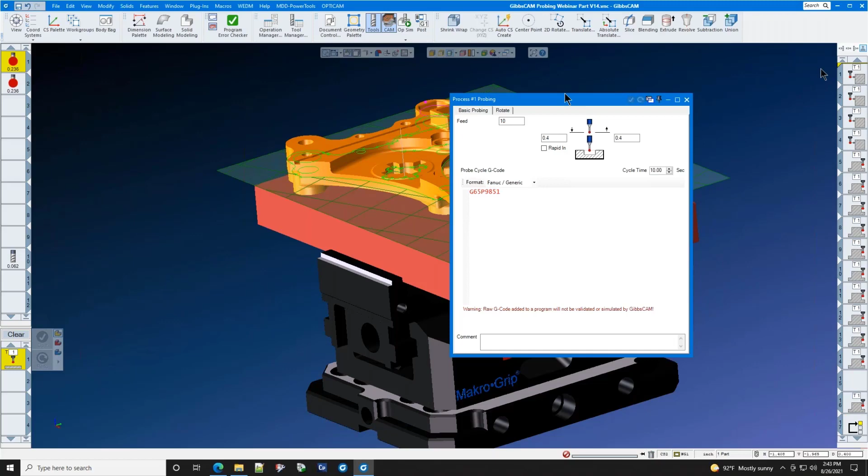No, it certainly can. You will go into your basic probing cycles, and that's going to be G65 P9851, I think it is, which is broken tool detection, 9851, 9852. You simply put that right into your program at the beginning, and you'll notice you have to have just a single piece of geometry to create one of these operations, but I'm going to put it right there at the top of the program.

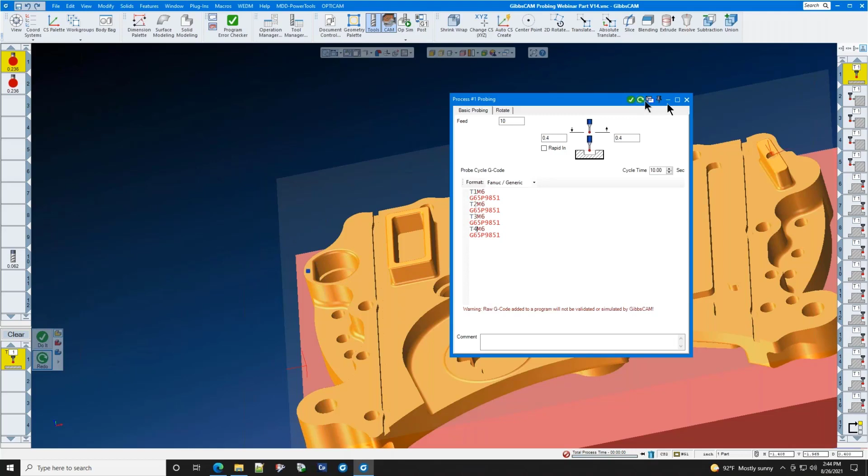You'll see when we post this—let's expand on this a little more. Let's put the tool in here. Let's do T1 M6 and then G65 P9851. Now let's copy this and paste it a couple times. Paste, paste, paste, and change this to T2, T3, and T4, and redo.

Now that you've done this operation, when you go to post it, at the top of your program you'll see the first thing that happens is all of your tools listed in that operation will get probed. Fantastic, okay.